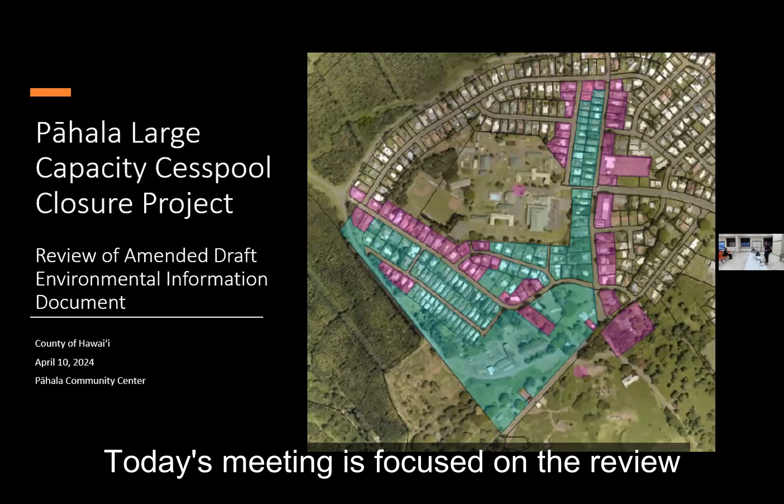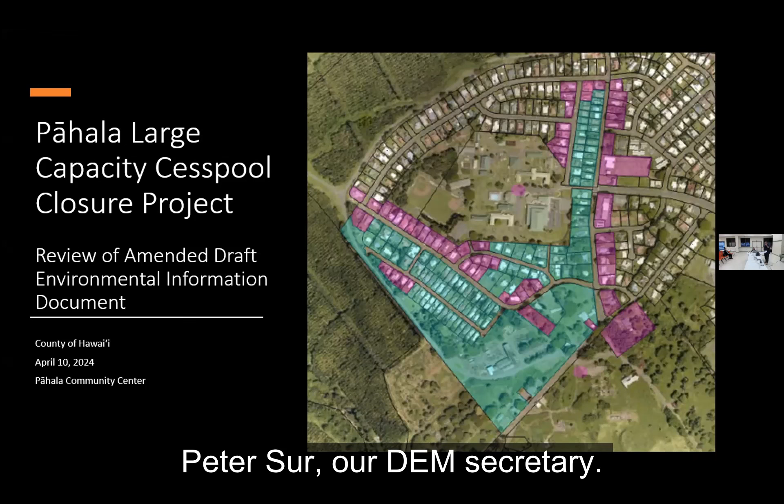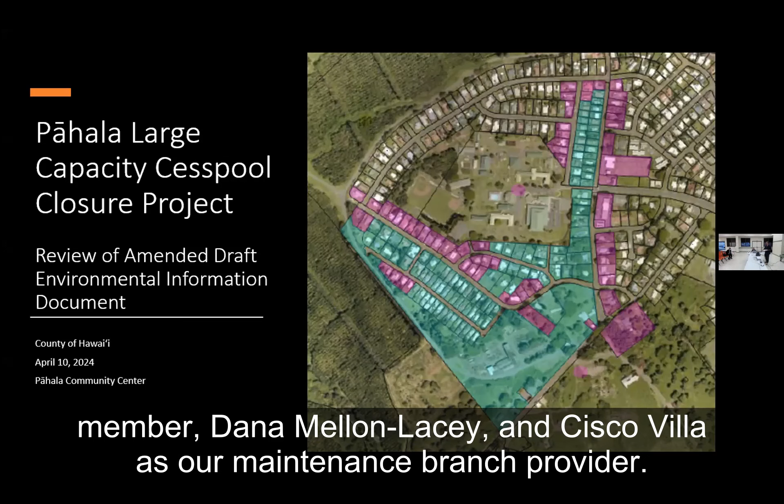Today's meeting focus is on the review of the amended environmental information document, EID. For introduction, I am Mark Grant, the wastewater division project coordinator. To my right is Kelly Hartman, our DEM planner, Peter Sur, our DEM secretary. Remotely we have Elise Lam, our DEM project coordinator, our corporate counsel member Dana Mellon-Lacey, and Cisco Villa as our maintenance branch provider.

This is a quick synopsis of where we stand currently. We completed the feasibility report, the preliminary engineering report, and initially did a draft environmental information document back in November. But where we currently stand is the revised draft EID documentation. That's where we currently stand on it. Next slide, please.

The purpose of today's meeting is to go over the review of the amended draft EID, which made a preferred selection on the alternative that will be proceeding forward. This is a recap similar to what we conducted back in November of last year. One purpose of this meeting is there was a revision within the AOC that required us to revisit the EID and redo this public comment period. Some of the information we're going over is very similar to what we did back in November, but the big aspect is we are making a preferred selection on the alternatives within this process.

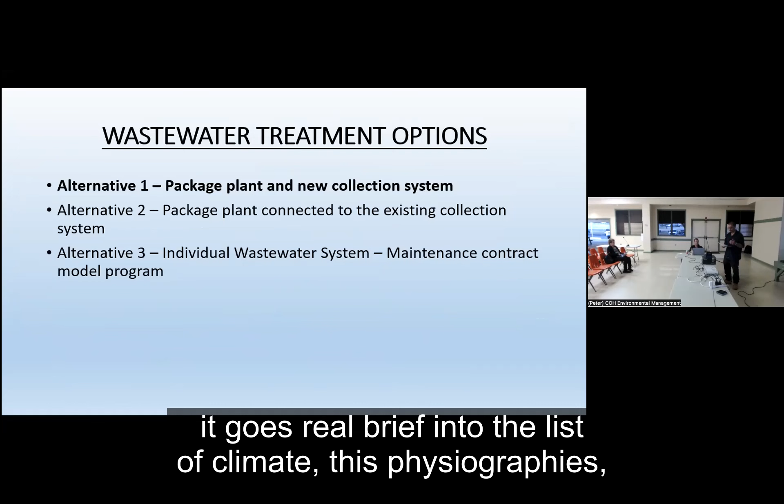The environmental topics covered within the EID: climate, physiographic, water resources, agricultural and natural resources, flora, fauna, cultural and historical resources, air quality, noise, roadways and traffic, hazardous materials, social economics and environmental justice, sustainability, human health and safety, and unresolved issues. The EID takes all these aspects for all 4 alternatives and looks at the impacts and mitigation measures, taking that into consideration.

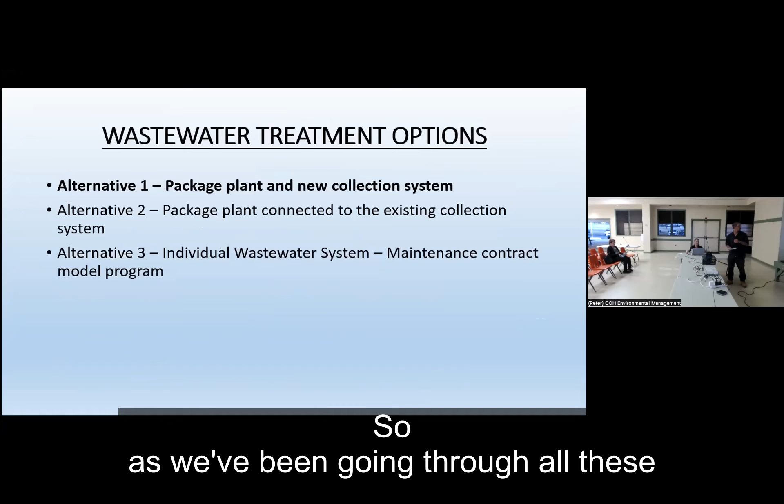As we've been going through previous meetings and discussions, I think we're all familiar with the 4 alternatives that have been presented and discussed in the past. The big takeaway is the county is selecting to go with the packaged wastewater treatment plant, new collection system.

Okay, is there any questions so far?

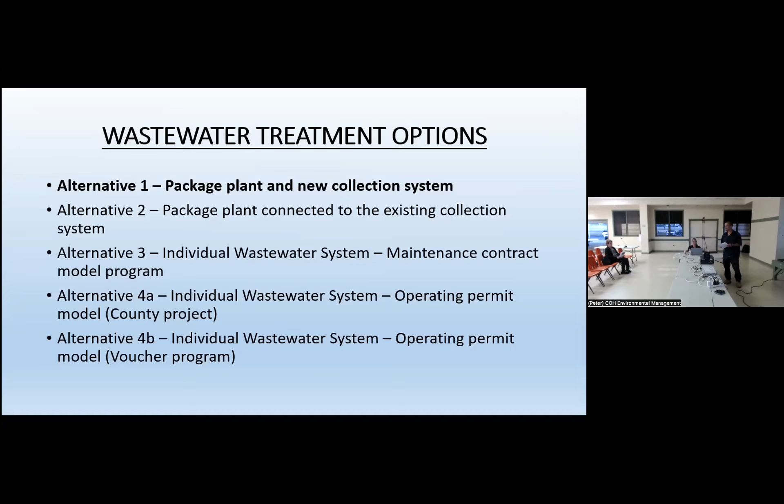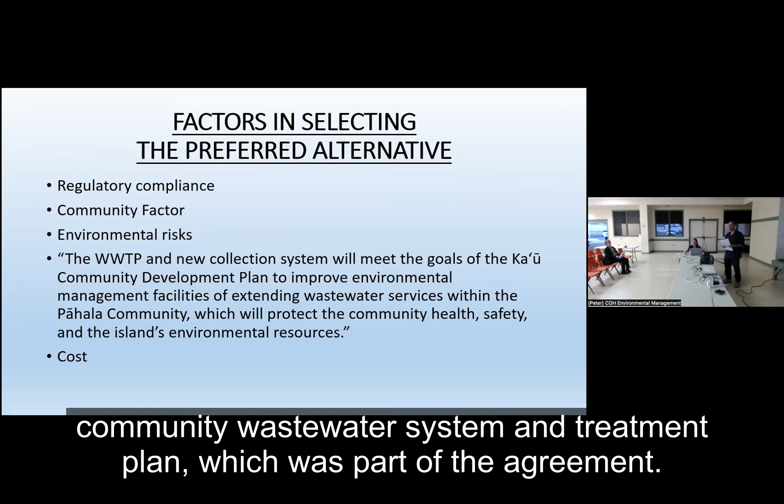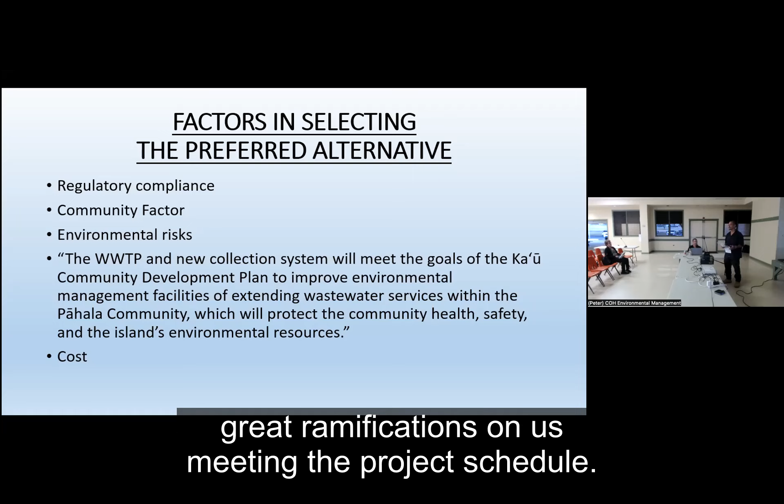The other regulatory compliance factor is, under the IWS alternatives, it would require HRS code changes, and that type of process would have great ramifications on us meeting the project schedule. So that's one of the major factors as well.

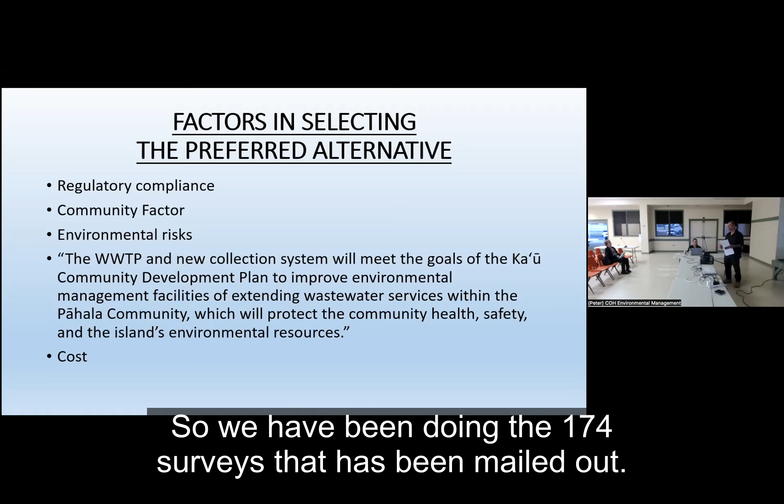So community factors we have taken into consideration: we have been doing 174 surveys that were mailed out. Based off the survey received, about 64 responded. The majority of the selections was alternate one. Also taking into consideration previous correspondence done by the past administration or staff, way back when the project started, it's always been communicated with the community as a new treatment plant, new collection system, taking again what had been expressed in the past as well.

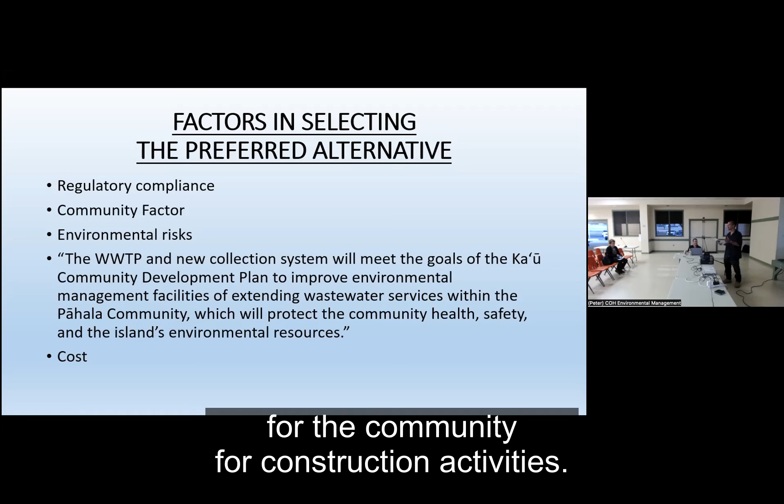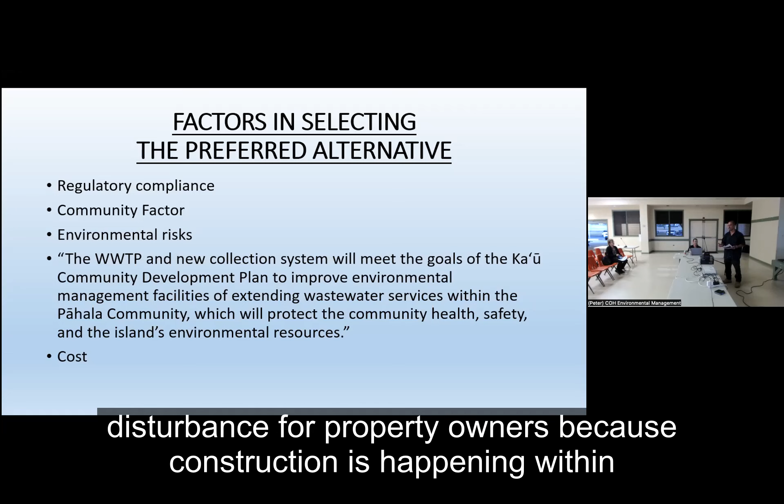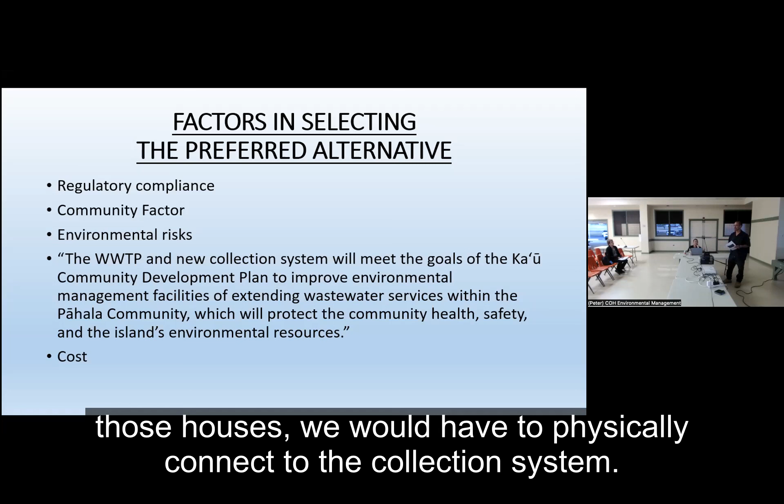Other factors, staying on community: we look at short-term disturbance. We understand construction activities for either option does have a level of short-term disturbance for the community. For the IWS, it's more of an invasive disturbance for property owners because construction is happening within the private property side. That's where with the alternative that's been selected, majority of the work is going to be done within the right-of-way of the roadways, with the exceptions of the existing lots that are connected - those houses we would have to physically connect to the collection system. So that's something being considered.

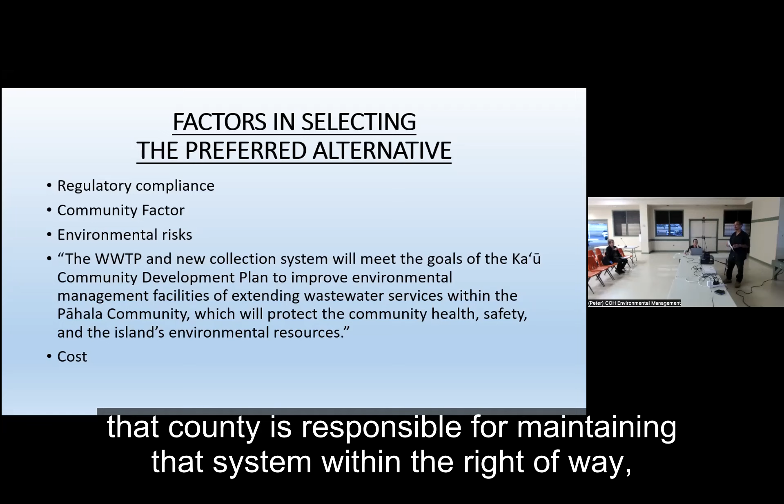Long-term disturbance: with the collection system being within the right-of-way, the county is responsible for maintaining that system within the right-of-way, so we don't have to go onto private properties for the life of the system. We're maintaining what's within the right-of-way.

So that's being taken into consideration as from a community factor. Environmental risks, we looked at it for IWS. IWS are just considered within the code, the HAR, as a temporary means of wastewater treatment, so it's not a good long-term solution. We took that into consideration.

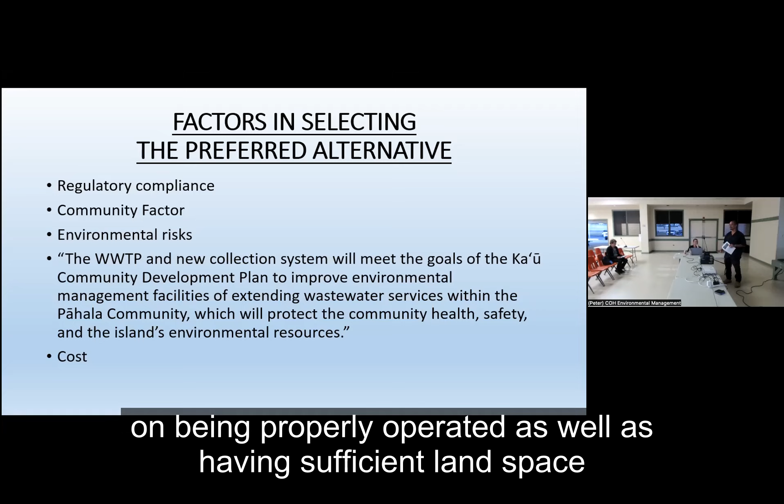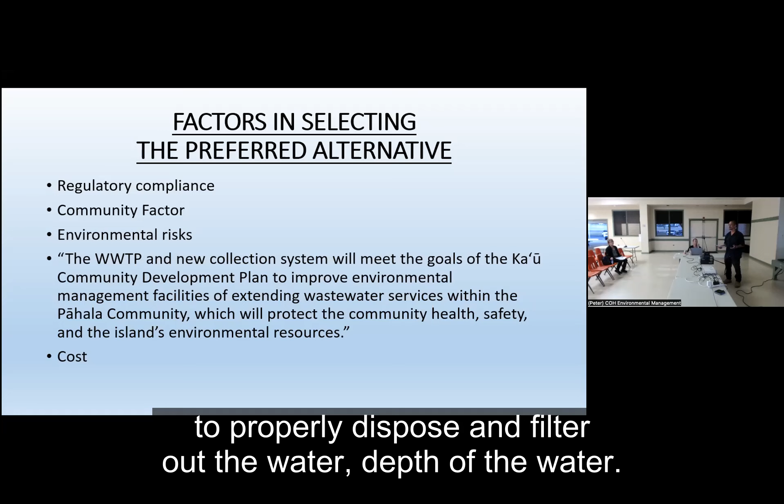Also, IWS is very dependent on being properly operated, as well as having sufficient land space to properly dispose and filter out the effluent water. So we face the challenge of small lots that are fully built out. It would have required variance from the Department of Health, which sometimes accumulated variances within close proximity, having potential impact to the environment.

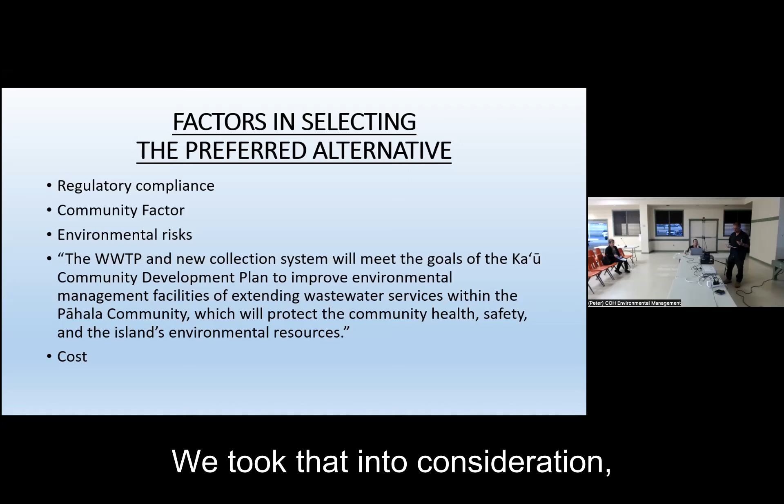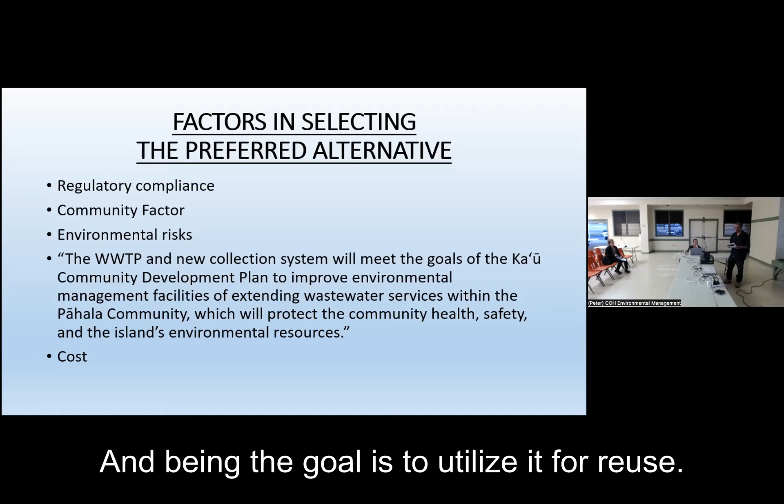So we took that into consideration, knowing well that at a treatment level, a wastewater treatment plant will provide a higher level of treatment. Since the goal is to utilize it for reuse, we will meet oxidation disinfection requirements, the Department of Health requirements for that purpose.

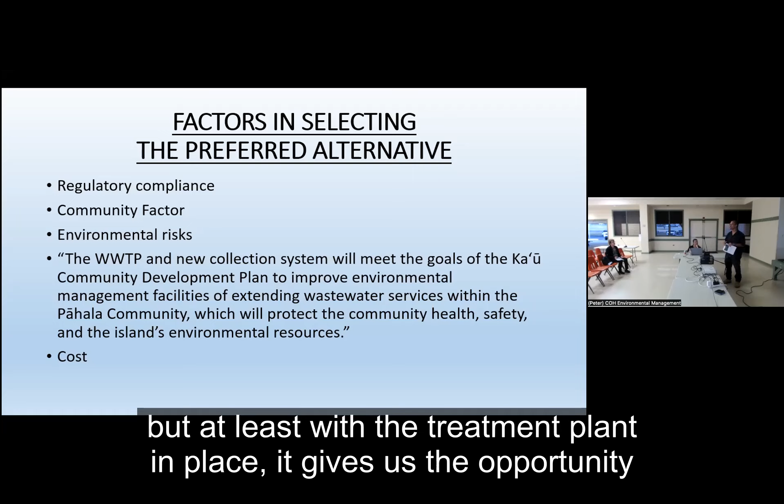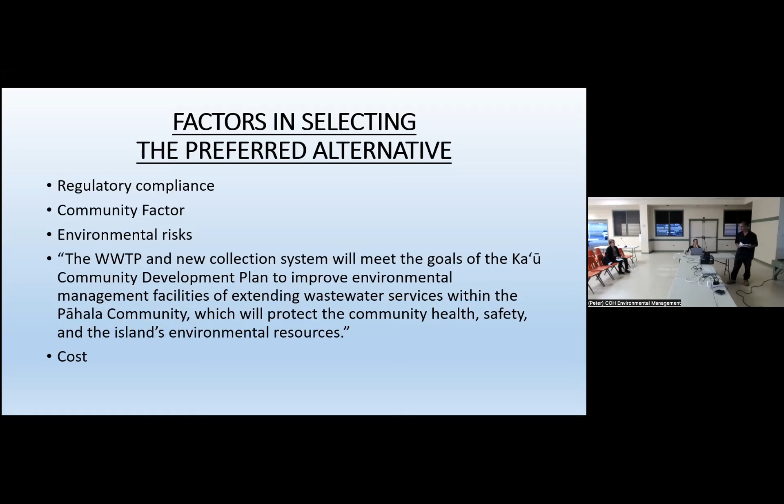Okay, so are there any questions on the factors or anything before we proceed?

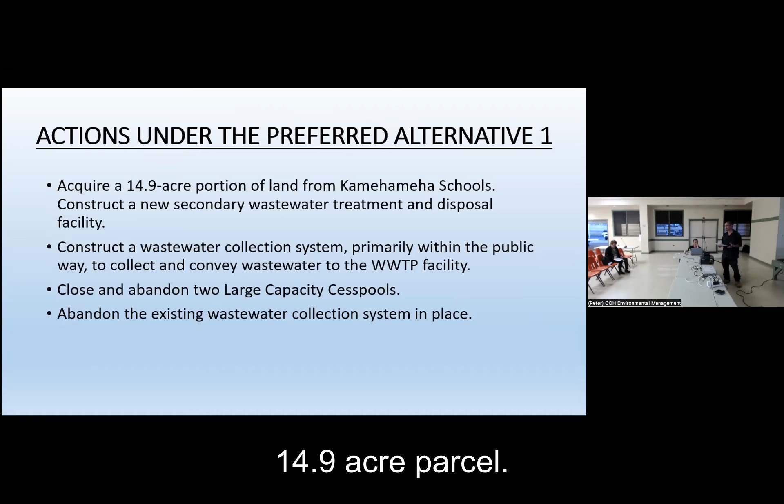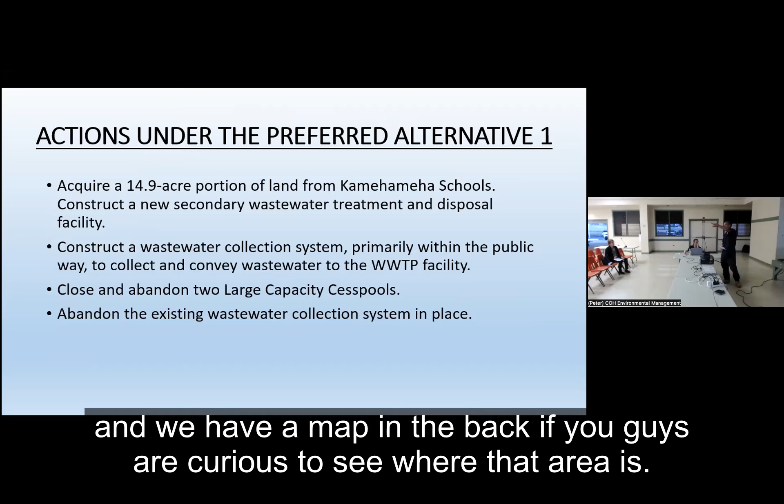The next step after acquisition is construction of the wastewater treatment plant and collection system, which will be primarily within the public right of way for the vast majority of the work. This will allow us to convey the wastewater to the treatment plant, and then we'll be closing and abandoning the two cesspools, and the existing collection system can be abandoned at that point. So that's a quick overview of the key milestones and big tasks to be completed with this option.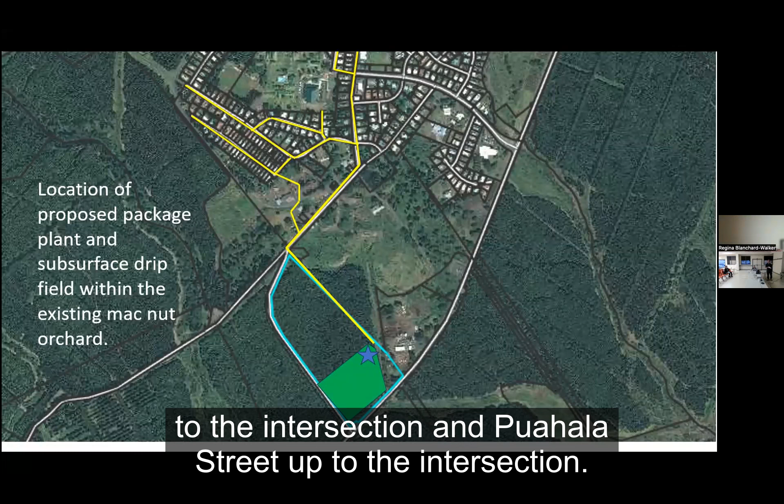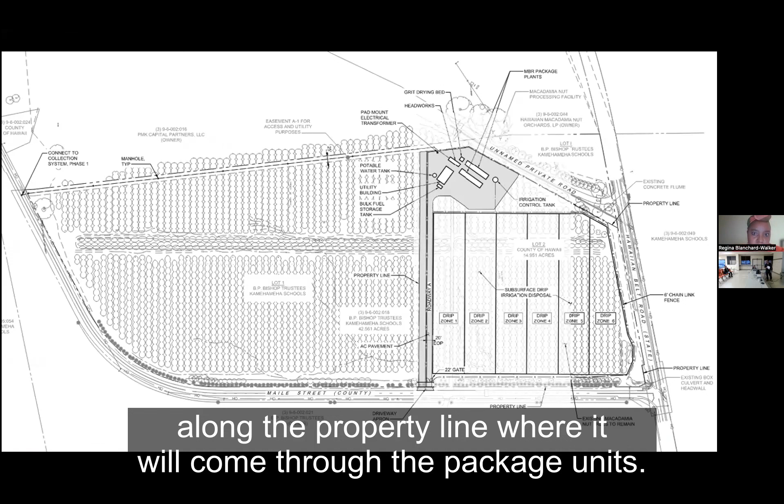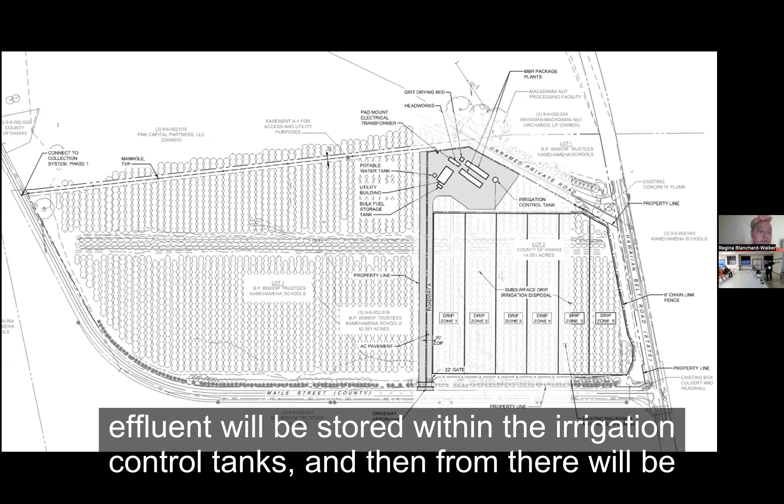What you see on the screen is the conceptual layout of the wastewater treatment plant facility, as well as the subsurface drip irrigation disposal system. The main trunk line will come down Maile Street, connect to Maile Street, come along the utility and access easement along the property line, where it will come to the package units. It goes through the treatment process, and then effluent will be stored within the irrigation control tank, and from there it will be disposed out into the subsurface drip irrigation system.

Did anybody have any questions on that concept?

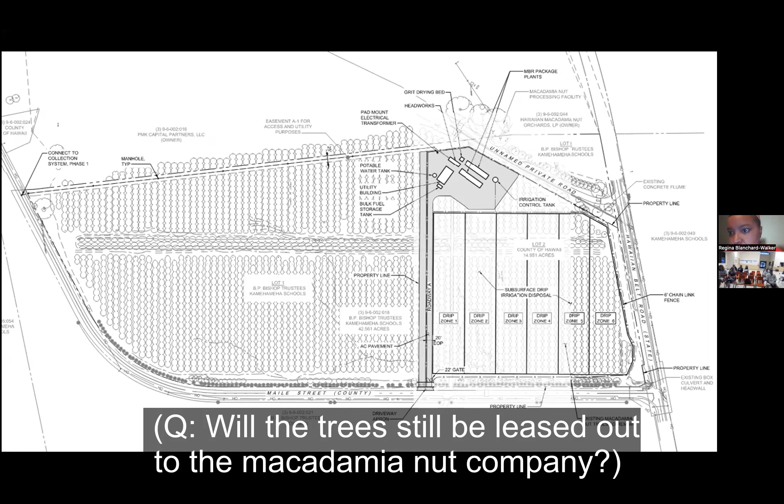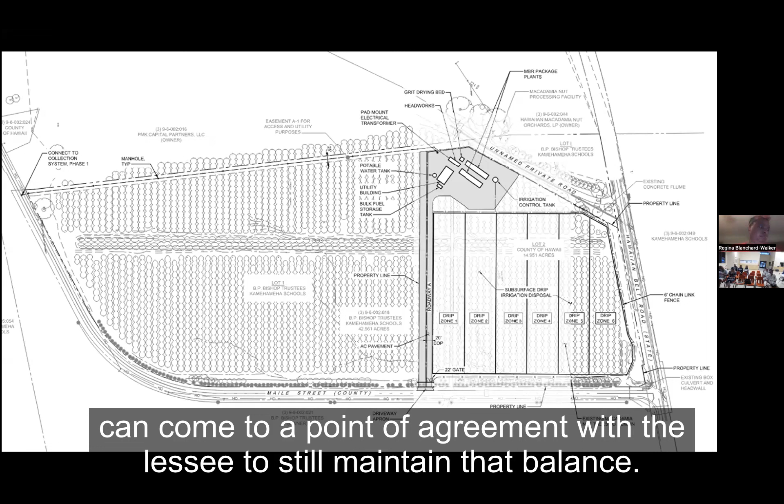All right, so some of the next steps for the Pahala community. Again, we are continuing to be available at any time. I think from the previous meeting, as we get to the end of the slides, you will have contact information.

The public comment period for the amended EID ends on April 15th. So I encourage you guys to submit any comments if you have friends or relatives that are impacted by the AOC project. If they can submit any comments, if there are any.

From there, we'll be compiling whatever comments have been received. Then we'll be able to finalize the EID and submit it to EPA, which will be one of the milestones within the AOC for us to comply with.

From there, we're going to be completing the design of the package wastewater treatment plant and the collection system, as well as the acquisition of the wastewater treatment plant parcel, all simultaneously, to put our best efforts forward in complying with the AOC.

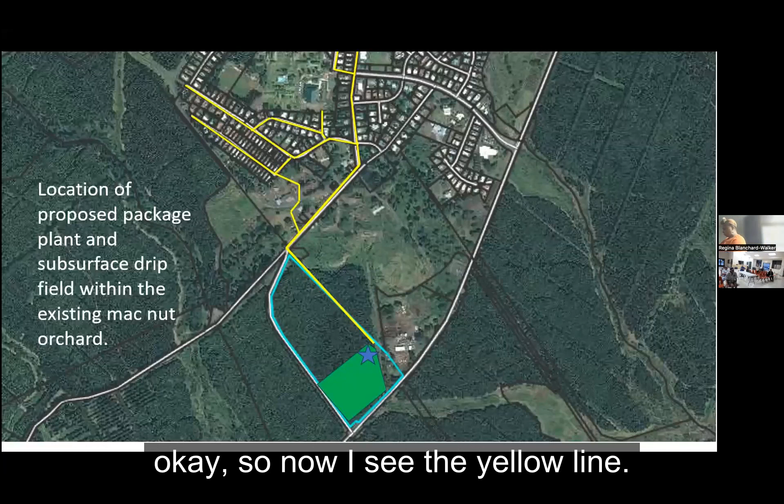Question is, you know that yellow line? I see now that you guys got it printed back on a map. Okay, so now I see the yellow line. The yellow line is basically the sewer lines, right? Okay, so I see them running past through my house.

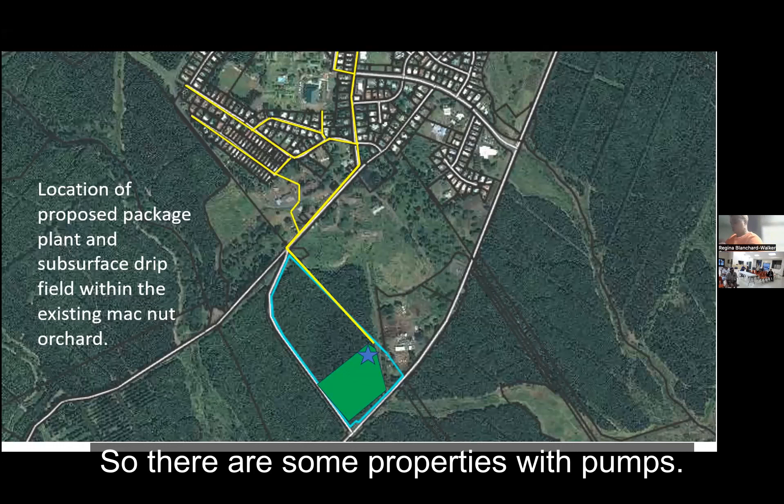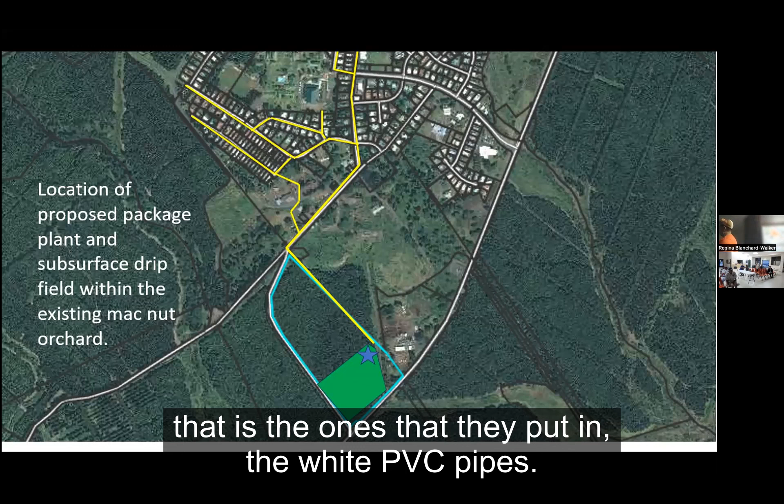So there's some properties with pumps, and Brenda brought up last meeting about gravity flow. So are you guys going to reroute, because we have some lines on our property, the ones that they put in, the white PVC pipes? Are you guys going to dig and reroute that? I don't know if you guys came and assessed the situation again since the last meeting, since we talked about gravity flow.

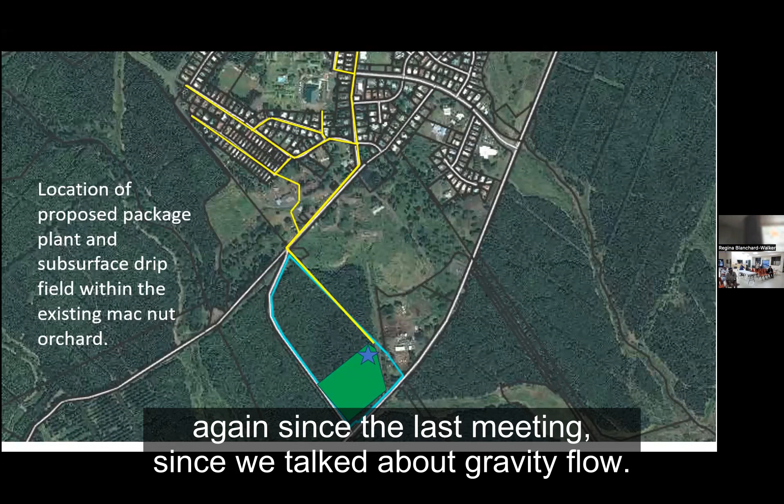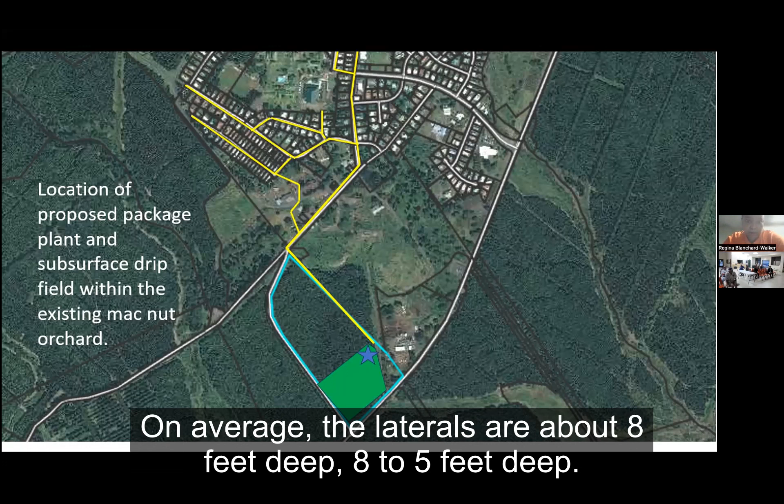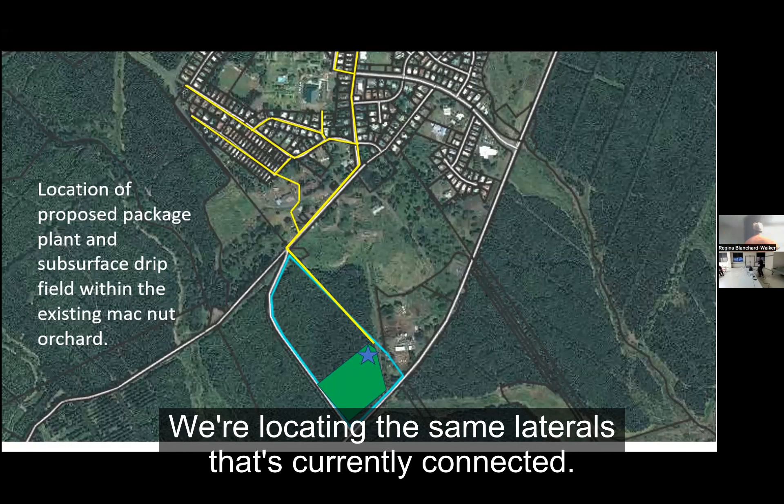Okay, so for the existing lots, they will be connected by gravity. We are taking into consideration locating laterals on the low end of the properties. On average, the laterals are about 8 to 5 feet deep, so we're locating on the low side, identifying existing laterals that are currently connected. Those will probably be reconstructed to properly tie into the collection system.

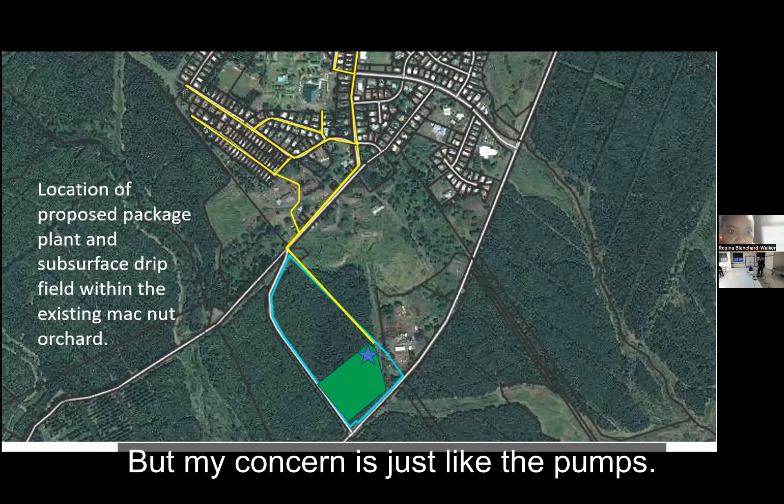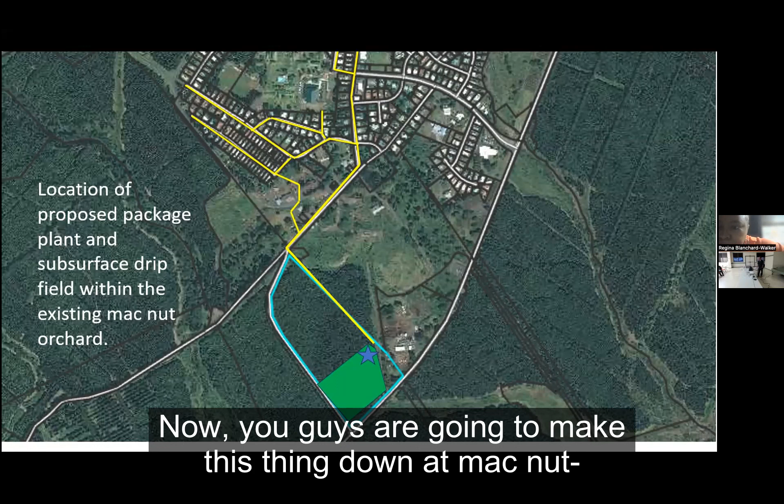Okay, next question, maybe a stupid question: when are you guys going to start on this? Every time I only hear dates and it keeps getting prolonged. I know you gotta put it up for bid and stuff like that, but my concern is the pumps. You buy the pumps, but I don't think you have any mechanics to fix them, and the pumps by now are outdated with no warranty. Now you're going to build this thing down at mac nut. Do you have a backup system in case something happens? Do you have a contingency plan? Okay, put that into play, that's all I ask.

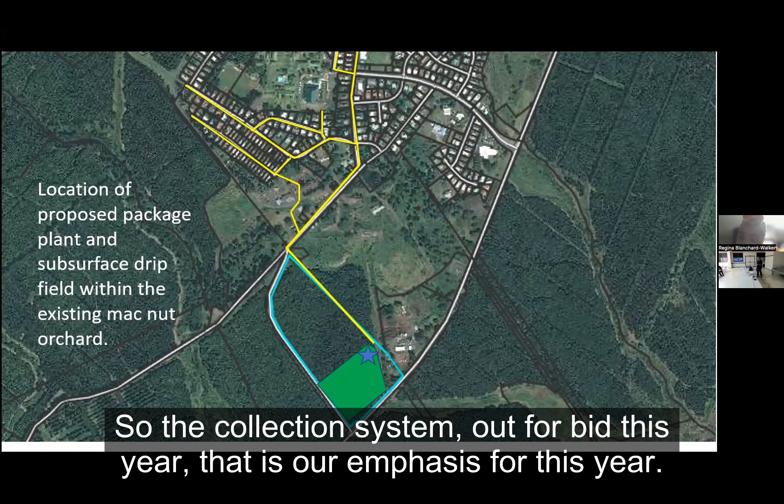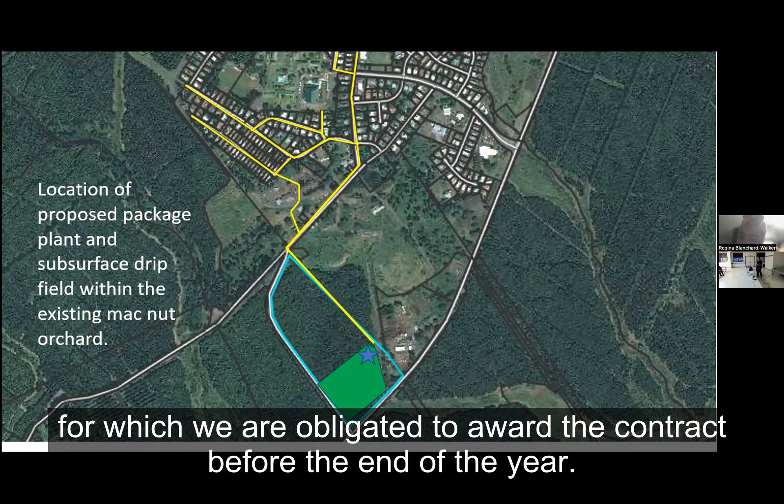Okay, not a bad question. So the collection system going out for bid this year is our emphasis for this year. The county has qualified for grant money to fund the project, which we are obligated to award the contract for before the end of the year, so there is pressure on the county's end to make sure we don't lose that grant funding. That's a good step forward for moving the project forward on the collection system side.

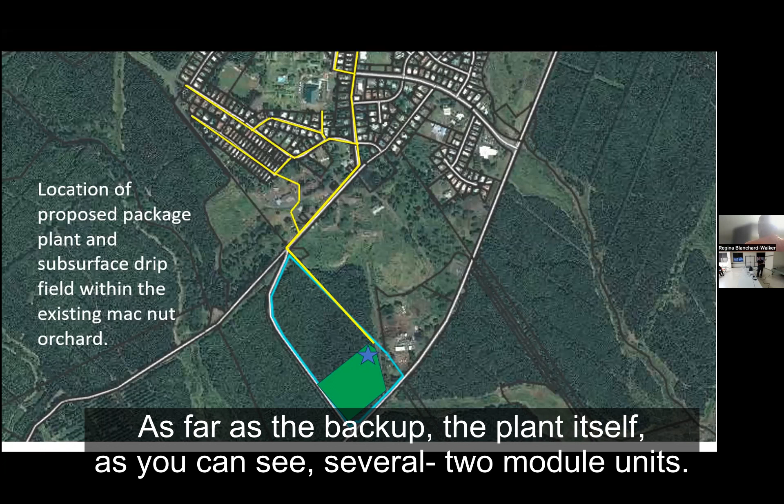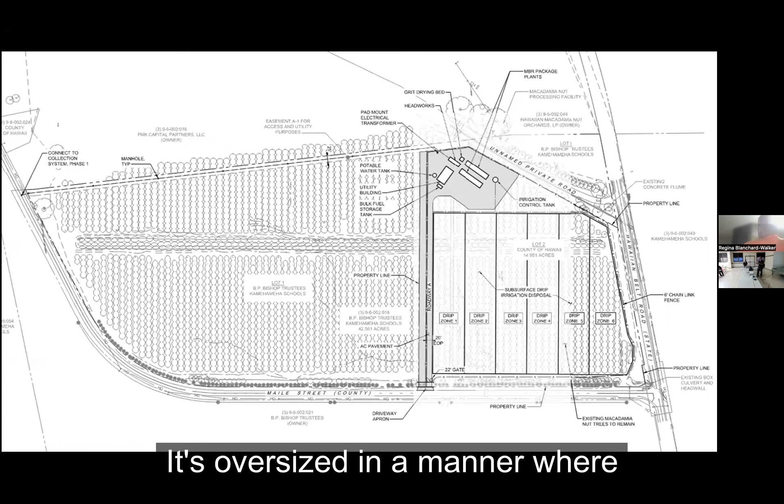The treatment plant is going to be following after that as well. As far as backup, the plant itself, as you can see, is two modular units. The plant itself is oversized in a manner where we're going to have more capacity than what we anticipate under this project, so there is that level of conservative approach on that aspect.

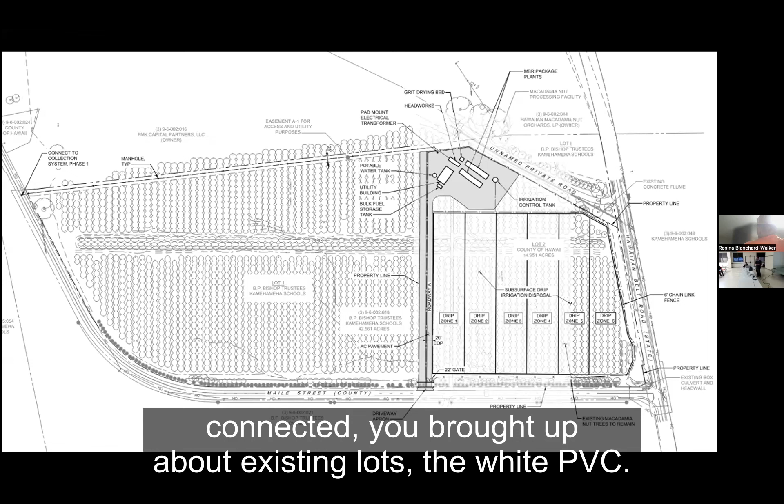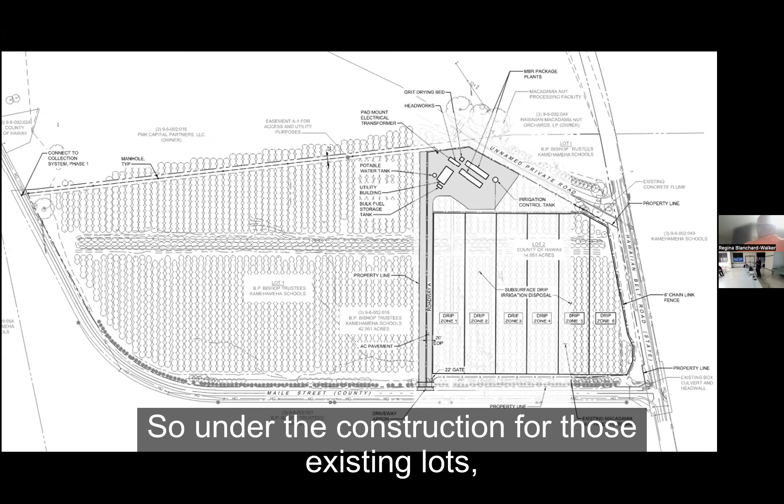But I just want to clarify the connection for the existing lots that are connected. You brought up the white PVC pipes - they're probably constructed to substandard grades, right? So under construction for those existing lots, we will probably end up having to reconstruct a good portion of it.

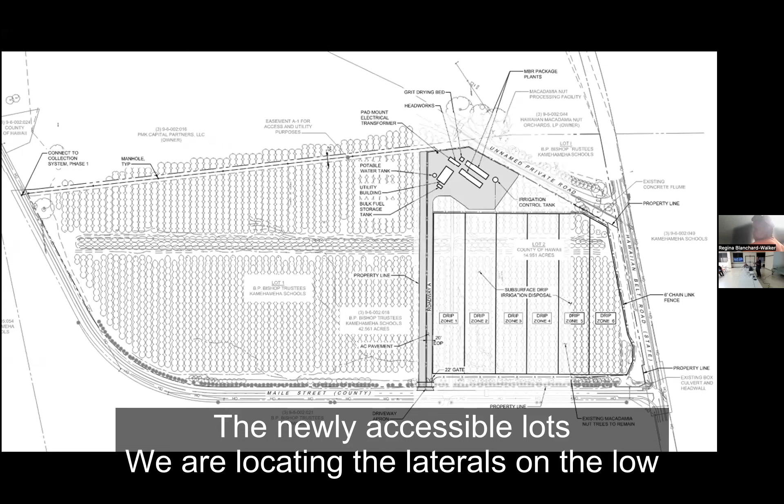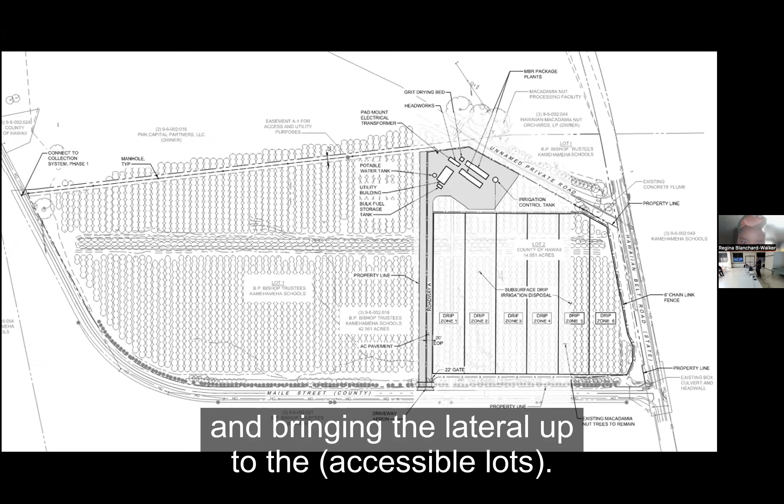To account for proper depth of the sewer line within the park. So for the existing lots that are connected, the newly accessible lots, we are locating the laterals on the low ends of the property and bringing it to the boundary.

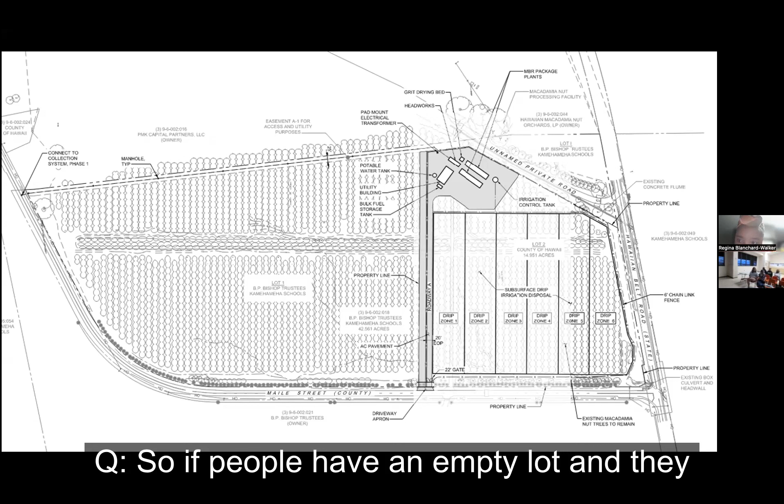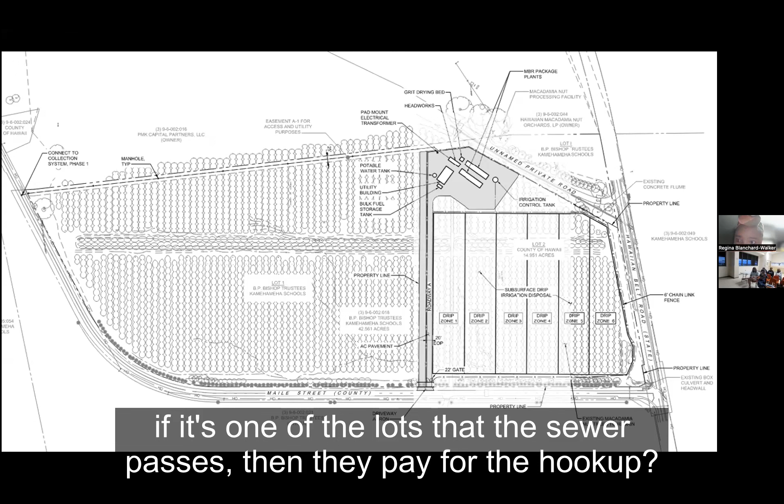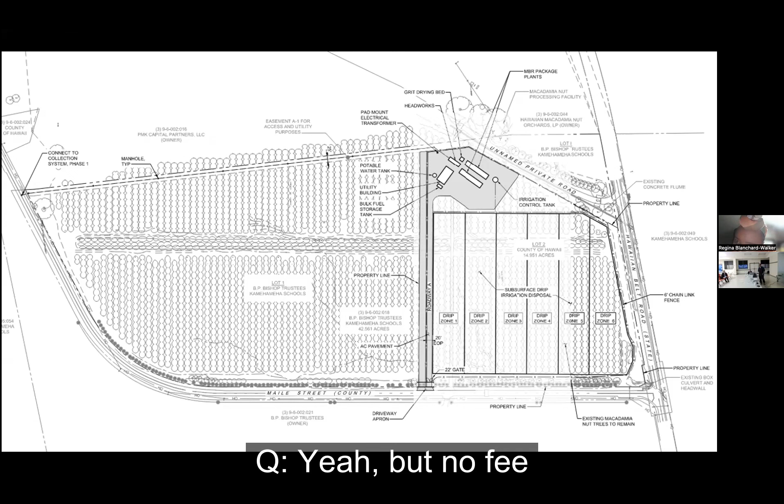So if people have an empty lot and they build a house, they're going to connect up. If it's one of the lots that the sewer passes, do they pay for the hookup? Under the current county code, we don't have hookup fees - anywhere. But again, if your lot is accessible by the sewer system, if you do construct your building, you would have to connect to the system, but there's no fee. The Catholic Church was asking me whether they have to pay the hookup - there's no connection fee.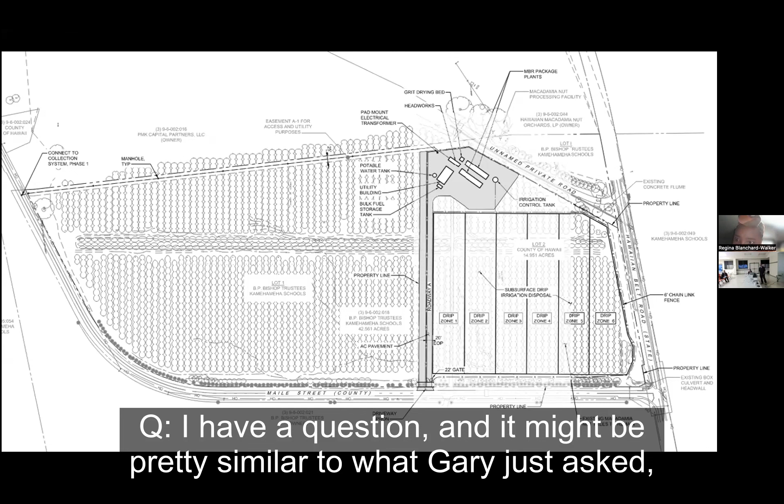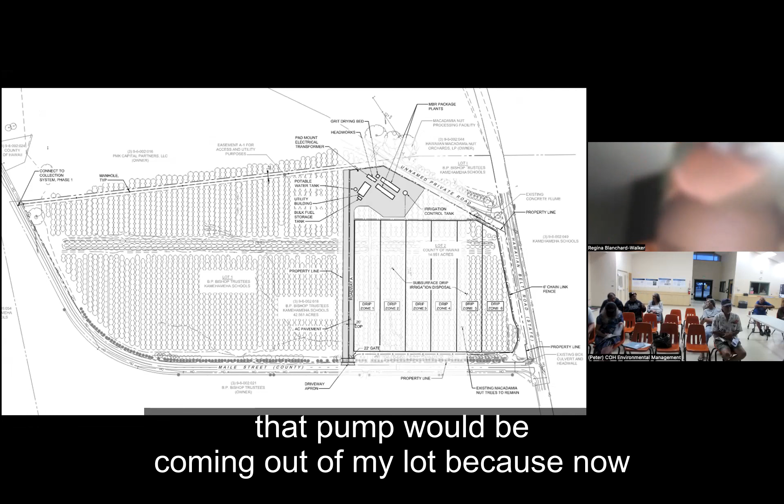I have a question - it might be similar to what Gary just asked. During the last meeting I had pointed out that my existing lot has the pump, and they put it in the corner of my bedroom home, so it's right there. I know we had a discussion - you said that pump would be coming out of my lot because now with gravity flow, I should not have to have a pump at all.

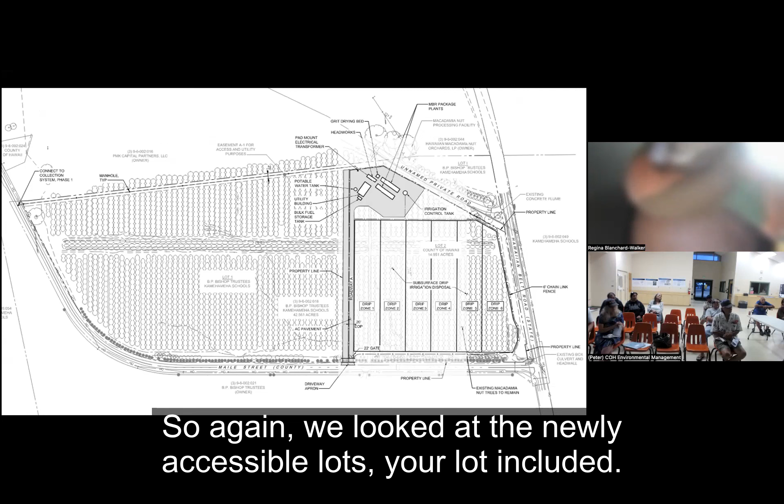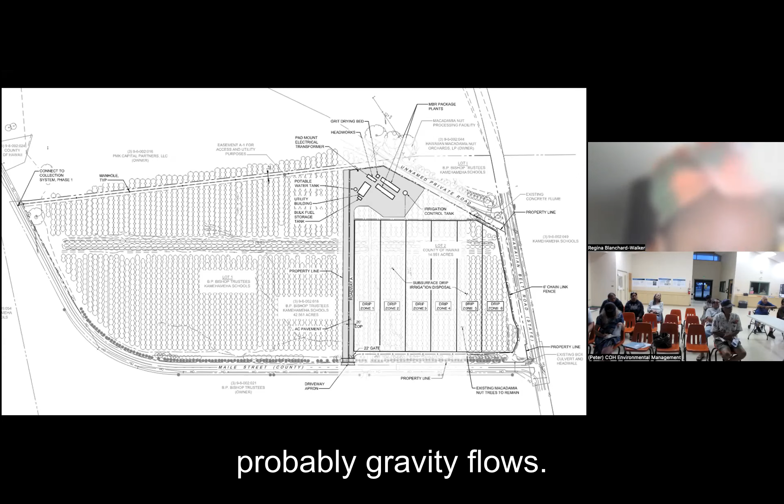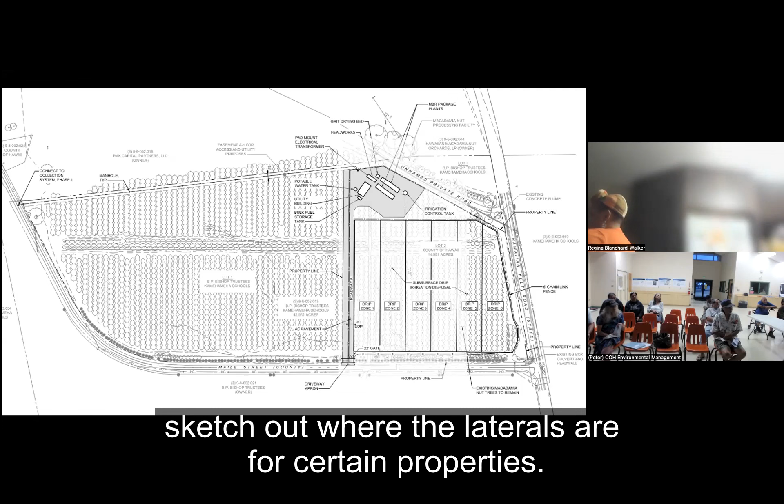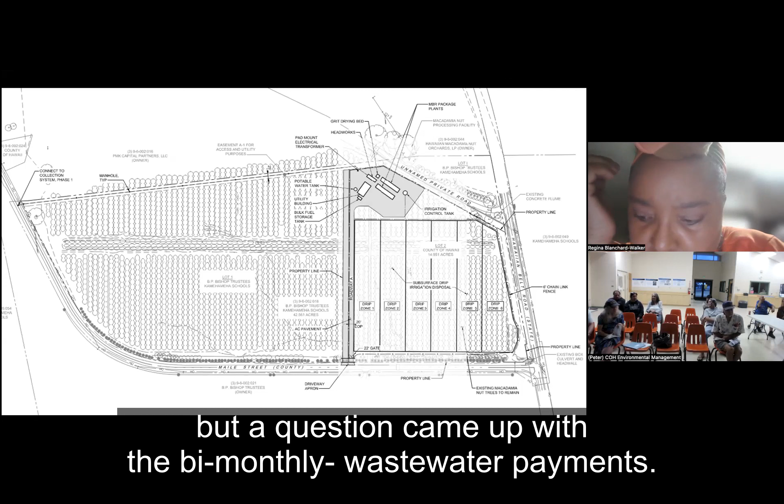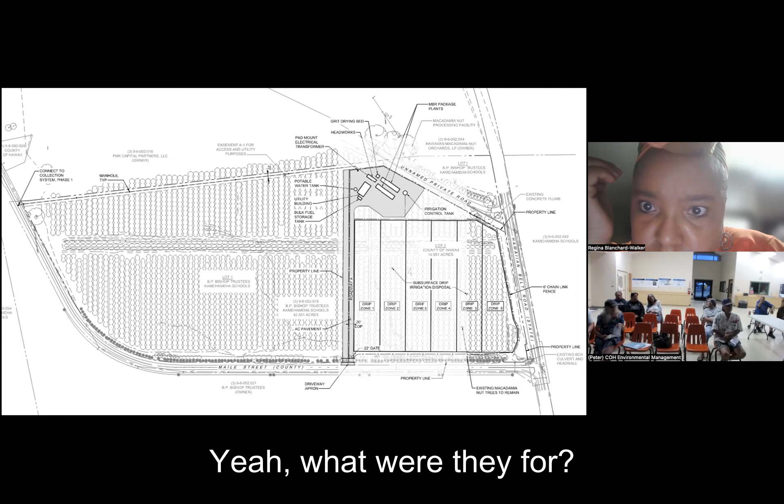Can I ask a question for her? She hasn't been at all of the meetings, but a question came up about the bi-monthly wastewater payments that we've been paying for years and years, and nothing really came about with the payment. What were they for? So if you're paying the bi-monthly fee, that's for the existing system right now - you're probably connected to the existing system, is my understanding on that billing system that's established.

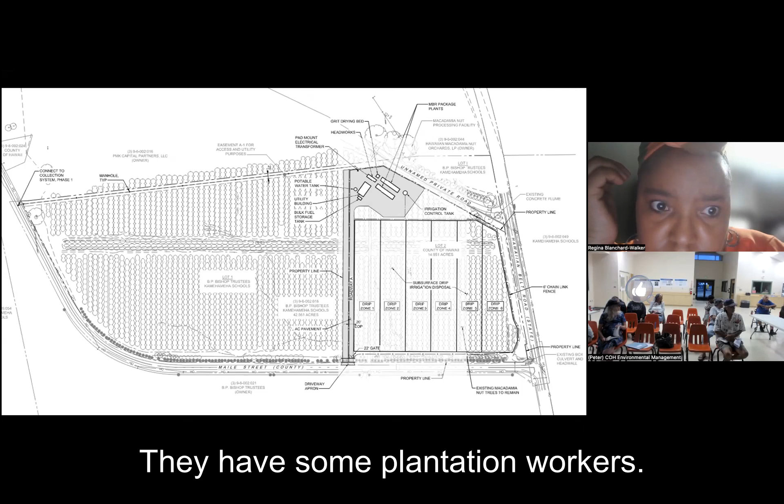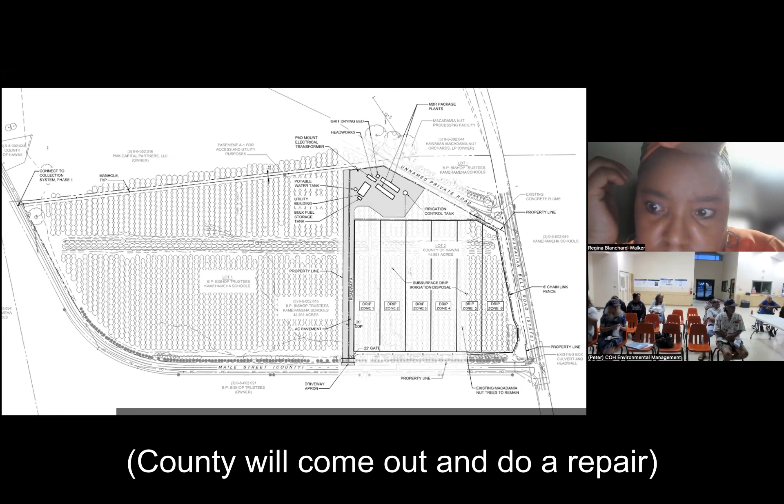That's what we were paying for before. Prior to the county taking over, were we paying before, I mean with cesspool connecting? I think the plantation was paying for it, they had all the workers - the plantation workers maintained the line. Then after the plantation closed down, we took over. We had the switch, which was closed down, so we had to maintain it ourselves.

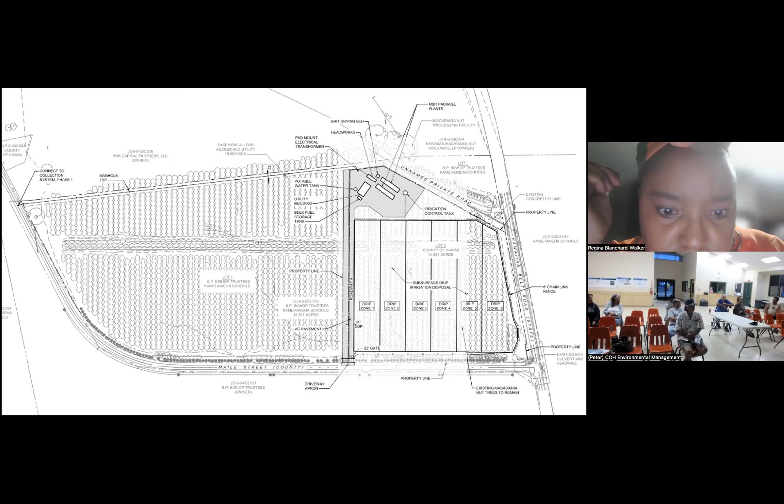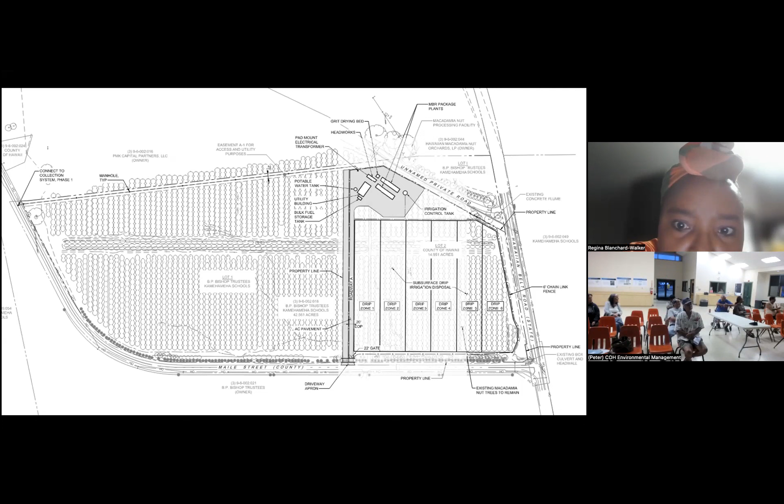But right now your fees are going to the county, so in case anything happens, the county will come out and do the repair on the property itself. With the existing line system running from the house to the street - right now if you have any plug up, no line, but the county will plug it out. That's what I'm saying, that's under the existing system.

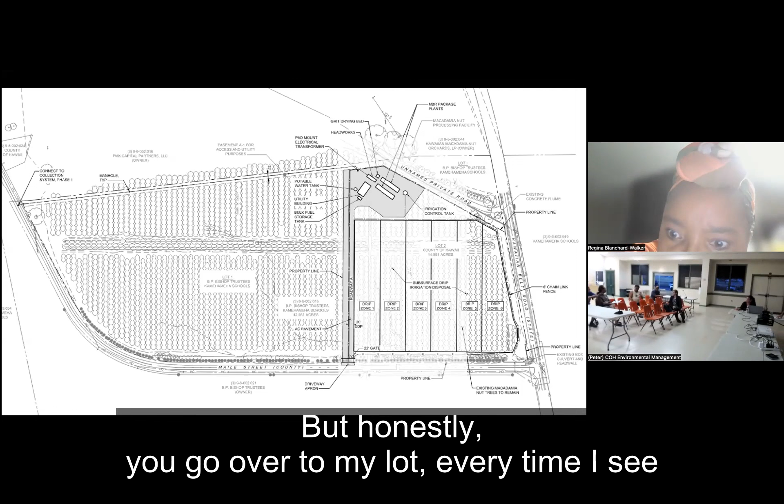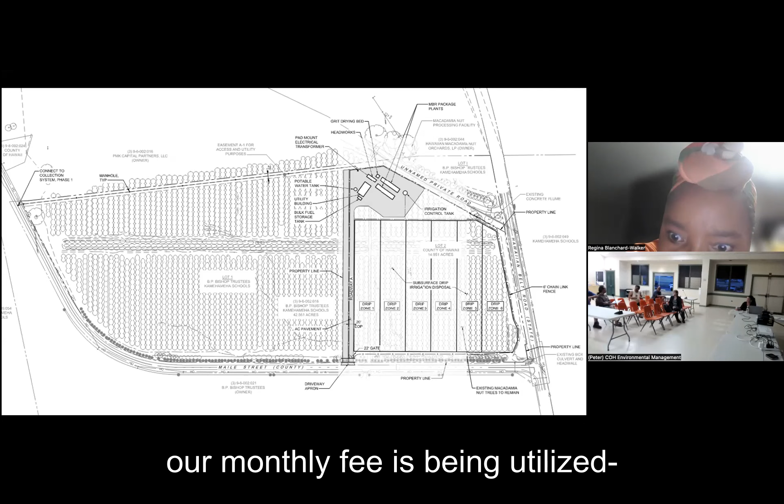One more, don't be shy. The thing is, everybody kind of says oh, we're paying for nothing, but honestly, on my lot, every time I see these guys come and pick them up - because the lines are old, they break and clog the line. So our monthly fee is being utilized, because they come and work like two weeks digging it up, but people don't see it if it's not in their area. I just wanted to let you know it's being used. And then we get the new sewer line, I think Cisco will be doing a good job, but it only covers my area - it takes a lot of time.